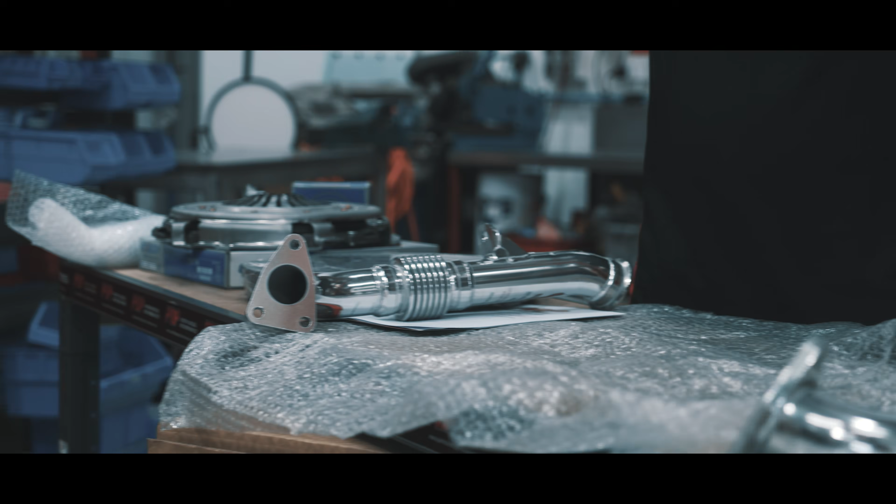But we haven't done a handbrake. Deja vu, I think we've had this conversation before. Give me the keys and say see you later. At least you know it'll be fitted right.

Today is the Troopy's birthday. We are going to give it a bit of a tickle. Trav, how you going, mate? Good, mate, yourself? Run us through, mate. What are we doing? Yeah, so we're going to put some mods into the vehicle. Obviously, we're going to tune it. We're going to ECU tune it this time, something different.

And obviously upgrade the clutch, upgrade crossover pipe, put some gauges in the vehicle so you can monitor the temps. And also down here, we've got the intercooler upgrade, flash tuning the factory ECU. Yep. So there's no cut and splice or anything like that. It's all tuned the factory ECU. And once it's tuned, you probably should get to camp in the daylight.

I just want to add as well, we're not tuning for Rhonda. Oh man! Tuning for Ronny. Yes. Which means we're not tuning a race car, we're tuning a reliability car like what's proven on the 79. So along the way, as things go into the vehicle, Trav's going to explain why we're using those parts, and I'll come in with a few layman's terms things as well, in case he uses too big a mechanical word.

How do you spell mechanical again? I'm not sure, I'm only a mechanic.

Let's begin with some sweet, sweet sounds of the V8 pre-DPF with a straight pipe. So that is what the exhaust sounds like now. It's the same exhaust that was on before we tuned the vehicle. It's a 3-inch Redback exhaust, straight pipe. Now I have tried the other options, we'll get to those in a second. But that's what it sounds like now. And it's changed a lot because of the crossover pipe, the tune, and of course the intercooler as well. It all makes a little difference.

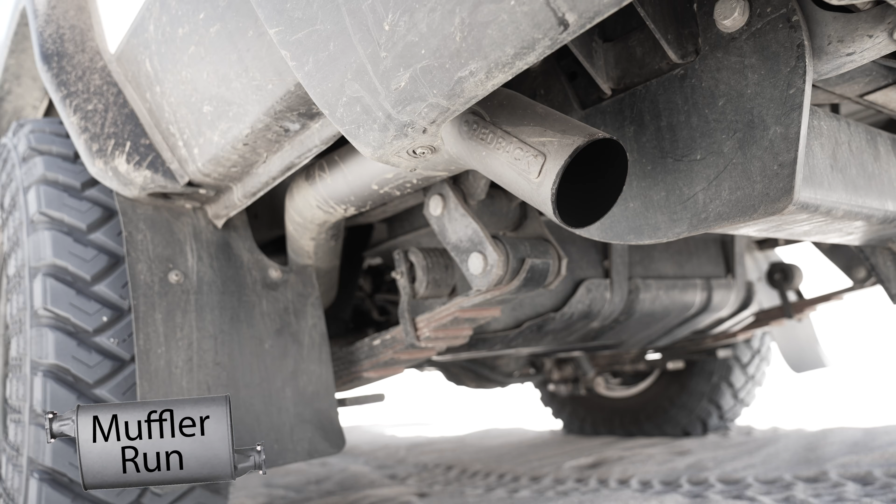This is what it sounded like before. Now, before. Now, before. As I mentioned, we have tried other options, the resonator and the muffler, and this is what they sounded like before the tune. Standard muffler. If it wasn't for the V8, I wouldn't notice the car's even on. From inside the car though, you can't really tell too much.

Okay, resonator. Liking that sound. Feels and sounds like a V8. This feels so much lighter than the 79. Labouring up the hill. Definitely hear it inside the cab though. Here we go.

Alright, we did it. Straight pipe run. Definitely a crackle. Yeah, I like this. Oh, there's the crackle. And that's how a V8 should sound.

So again, muffler, resonator, straight pipe, muffler, resonator, and what it sounds like now again with the straight pipe.

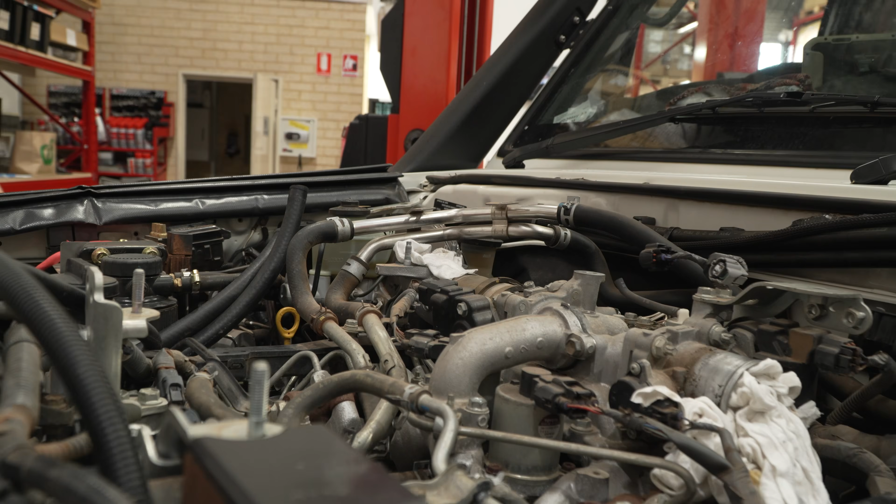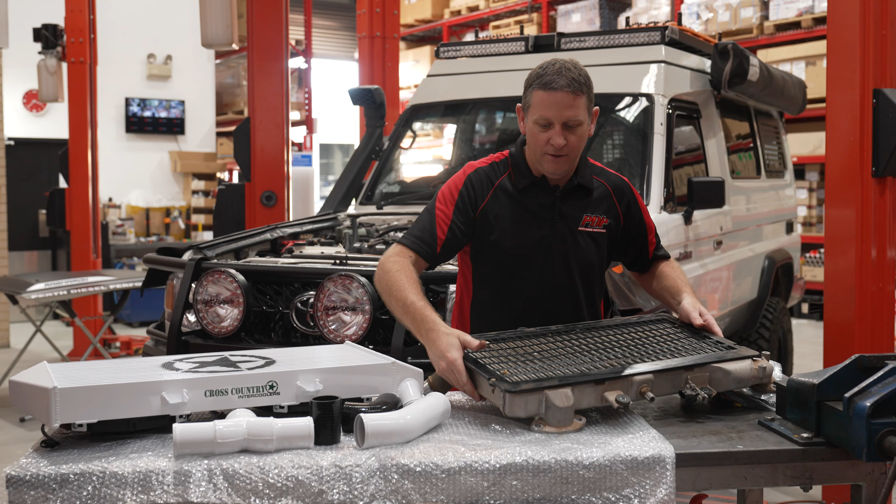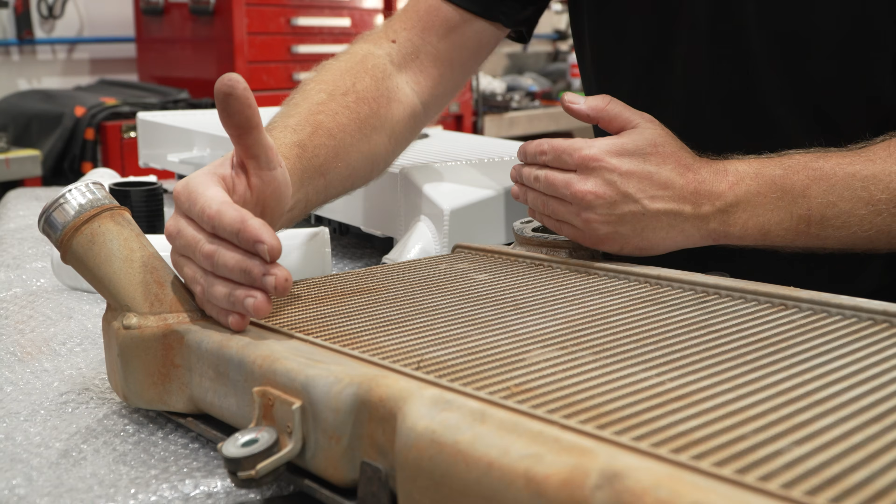Okay, so we've just got the factory intercooler off. What we're going to upgrade with is the Cross Country intercooler. As you can see, there is a slight change in size of the cooler. The core is much thicker. The subtle differences in the two intercoolers: the factory intercooler here, you're going to see the extrusion runs from the front tank to the back tank. And then when we come over to the Cross Country intercooler, we then run from left to right.

So effectively, we've got about 270 millimeters of extrusion in the tube here, and this is roughly around 600 mils, so it means there's more surface area, so obviously the cooling efficiency of the intercooler is going to be much better. With the added bonus as well, we've got the fans underneath to help with the low down speed so we can get the airflow through, so we've got more cooling capacity. And obviously it's a thicker extrusion as well, the core itself.

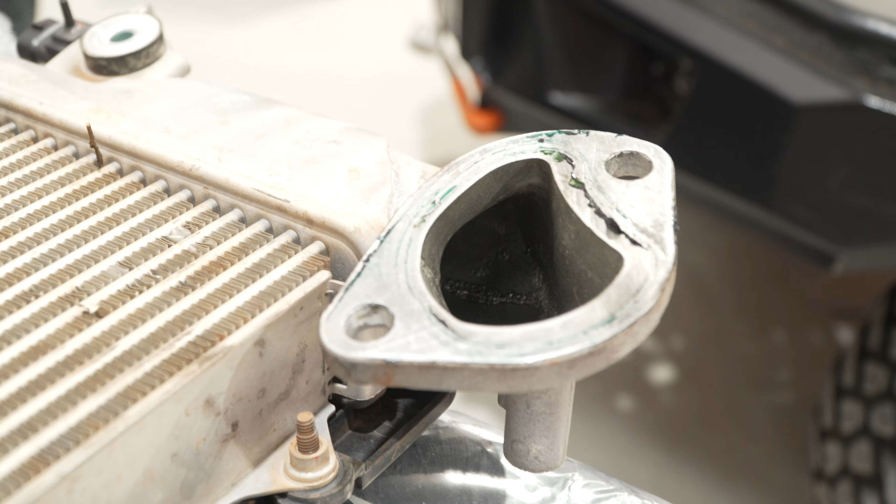Inside of the tanks, the factory cooler has a lot of sharp edges, which obviously reduce airflow. And inside the Cross Country intercooler, they've done their art. Everything's nicely finished off, all TIG welded, mandrel bent pipe work, and obviously larger silicone hoses and clamps to suit. We'll get this on the vehicle and get it all fitted up.

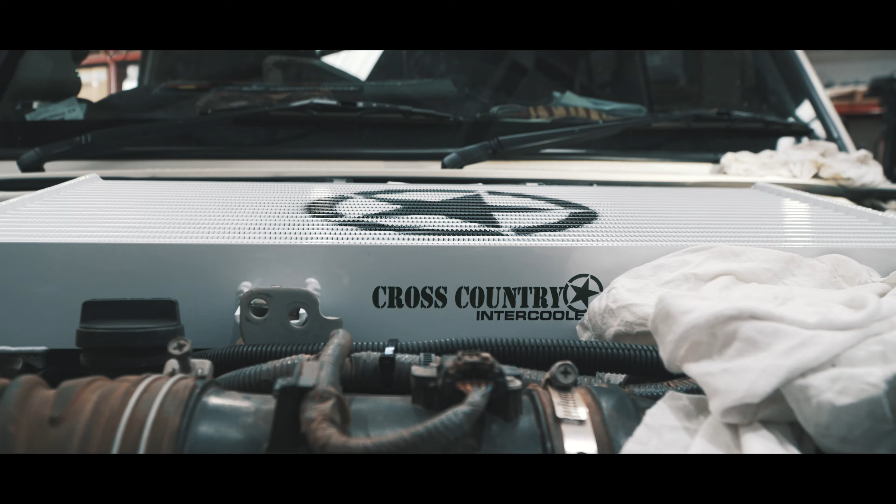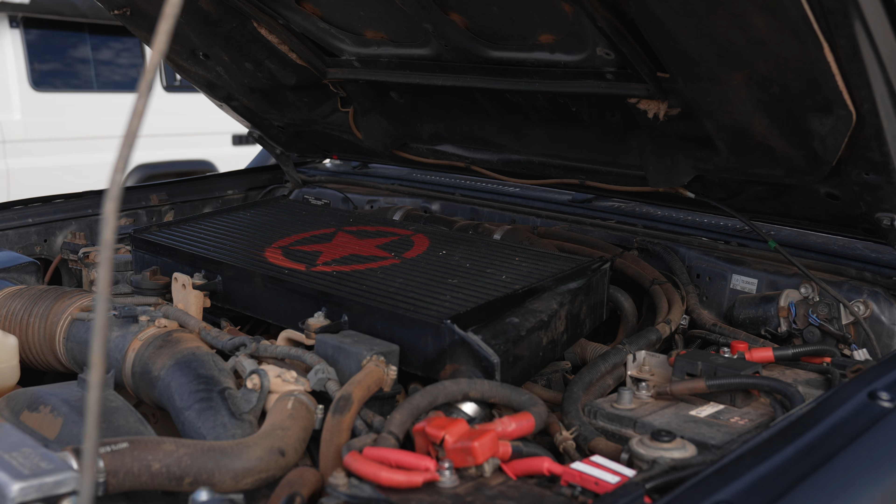Apart from mounting the intercooler to the engine, you also have to trim the hood lining and add a couple of brackets. By the way, I've had this exact same intercooler on the 79 for 2 years. In complete layman's terms and experience with the 79, putting this exact style of intercooler in your vehicle will reduce your EGTs by 50 degrees.

50 degrees Celsius may not sound like much when we're talking exhaust gas temperatures, but when you're teetering on the edge of 550 EGTs towing a trailer on a beach for a long period of time, you don't really want to be sitting up at those degrees.

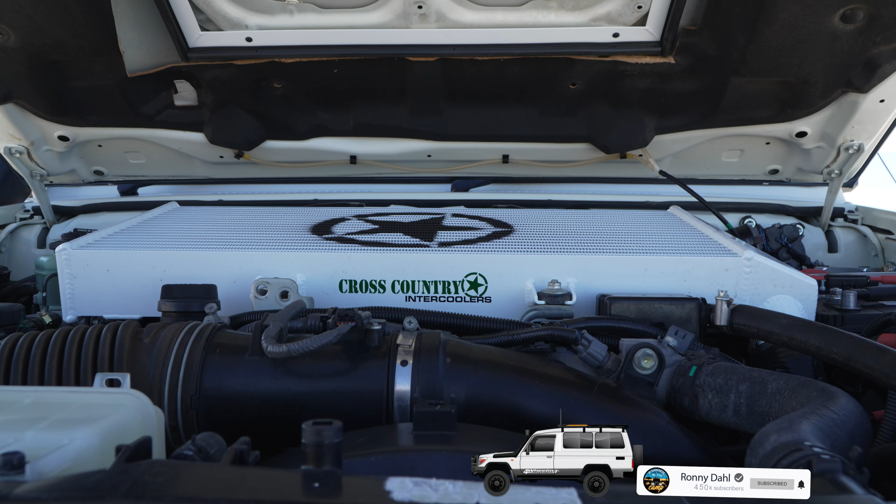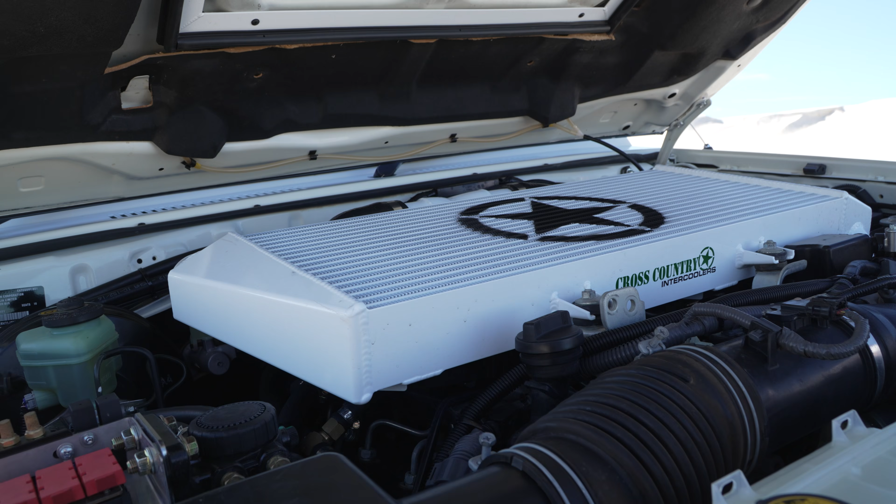But sitting at 500 is acceptable, and in some cases, all the way down to 450. And that's the main reason why I upgraded the intercooler on my 79, and the same reason why I'm putting the same system on the 78. And that's really good. So on the highway going up hills and stuff, it used to go right up to 500 or 550, but 450, 500, much better. I'm not worrying about the engine too much being so hot.

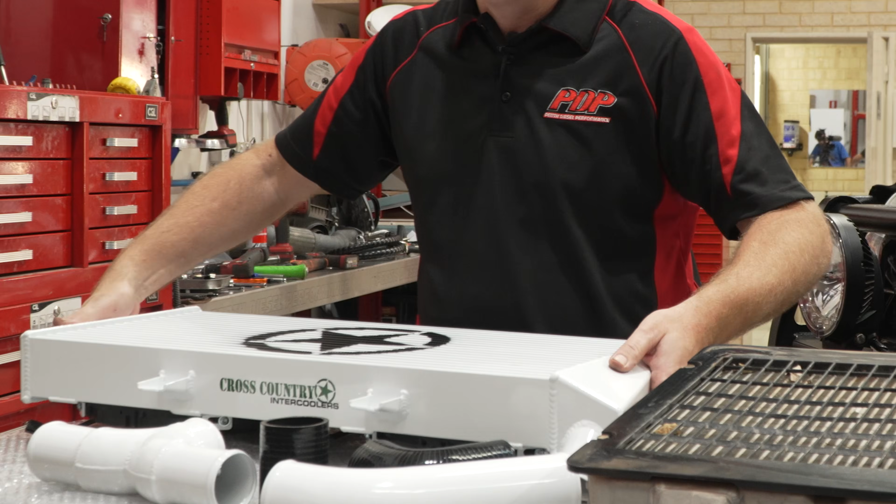But not only that, in low range, when you're sitting on some soft sand on a beach and you're not going that fast, the intercooler fans underneath will make up for the lack of the forced air coming through the actual bonnet scoop, which also in turn keeps it cooler. So an average of 50 degrees. And how do I know that? I can monitor it with these gauges right here.

This is the top one, the EGT gauge. This one down here is a boost gauge. With the EGT gauge, I can keep an eye on where the vehicle's sitting and how hot it's getting. And ideally for this type of vehicle, from learning from the 79, 10 years driving it, around 250 is good on the highway. And when you're really pushing it, look, 550 is just too much, as I mentioned just before. So ideally, when you're really pushing it, 450, 500, that's kind of where you want it to sit, maximum.

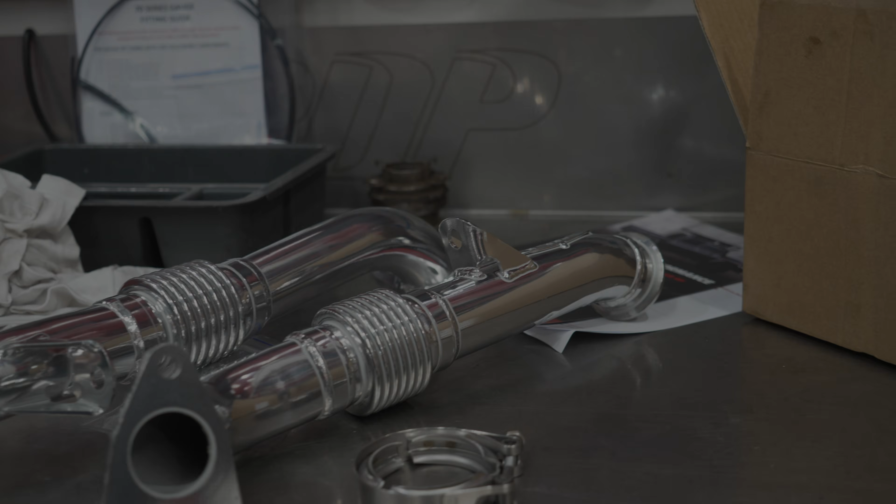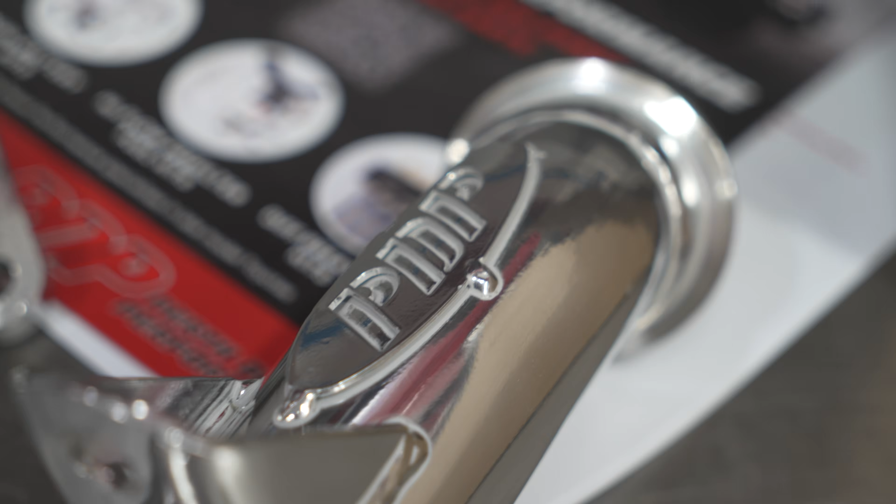So we've just taken off the factory crossover pipe. We're going to upgrade it with the crossover pipe here. Difference in the two, this one here is obviously still port matched flanges on here. It's ceramic coated to keep the heat in there, whereas the factory one's got the bellows and wrapping only in certain sections. It's got directional exhaust bellows in here, so as the gases flow one way. It's got a V-band in the middle, so fitting is easy. All the factory mounting points are there. It's got the new gaskets to install, so let's get it on the vehicle.

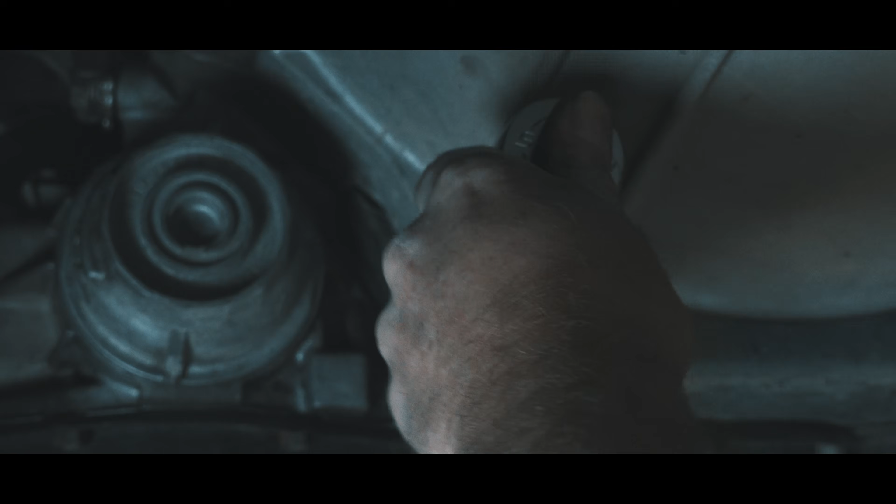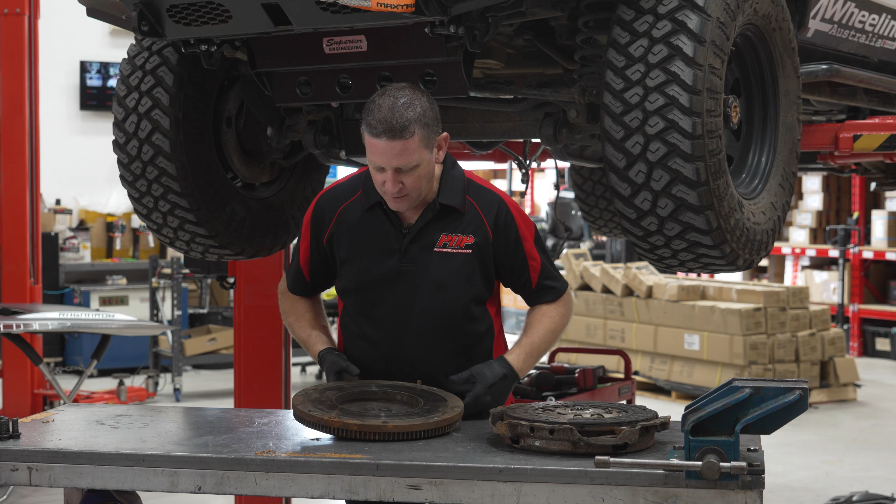Okay, so we've got the clutch out of the vehicle. Flywheel's actually looking pretty good, so Ronny's driving style, bit of a big tick, no real hot spots on the flywheel. However, the clutch engagement point was very high on the take-up, so it was time for a clutch upgrade. Clutch plate and pressure plate, all pretty good, just obviously got that degree of wear. So let's check out the new clutch upgrade we're going to fit today.

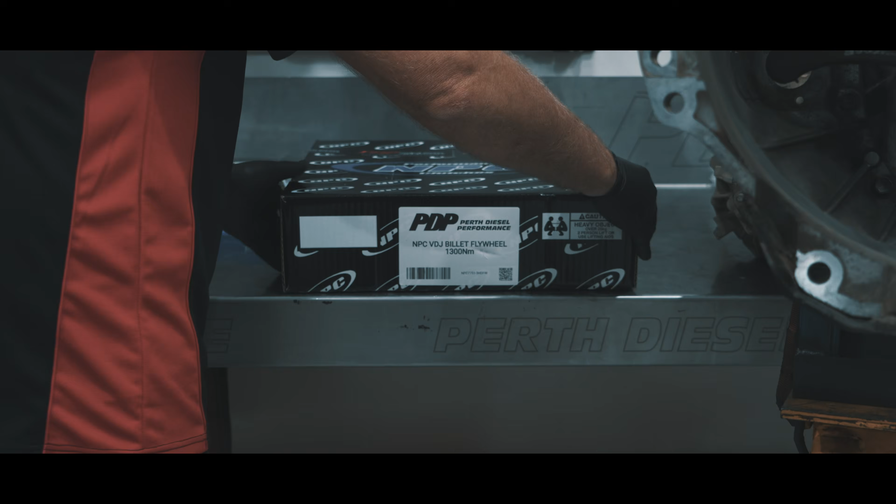Quick run through of the components. We've got a billet flywheel here. We've got the clutch cover. Also, we've got the clutch plate here. We've got a spigot bearing, throw-out bearing, and all the hardware to mount it up. We've also got an aligning tool, and we're going to reuse the genuine flywheel bolts. One quick tip I do want to say, when you're handling a new clutch, either clean your hands before you're touching the mating surfaces or put clean gloves on, because you don't want to contaminate the new clutch assembly. So let's get into it and get it fitted up.

In terms of the clutch, it feels amazing. Now obviously the main reason for the clutch is because we've tuned the vehicle. With the 79, when I first got the tune, we didn't upgrade the clutch, and straight away I was slipping in third and fourth gear, even in second gear actually. But the other benefit I've got now is before I was getting pretty tired in traffic because the clutch was so heavy as well. But now it's so much softer as well.

When I first got in, I almost put the bloody clutch pedal through the bloody floor. It's very similar to the 79, although the 79 feels a little bit different for some reason. It's the same clutch and everything. Might just be because I've worn that one a bit more. Feels really good. And the uptake on it is quite responsive too. There's no shuddering or anything like that.

Tuning Ronny's Troopy. I had to tune it with an ECU tune, so it's one tune, it's got to be fit for all purposes and safe and reliable. The difference between the two, obviously Ronny's 79 series was tuned with a Unichip with a piggyback ECU, and that has multiple maps, so we can do multiple tunes for different situations.

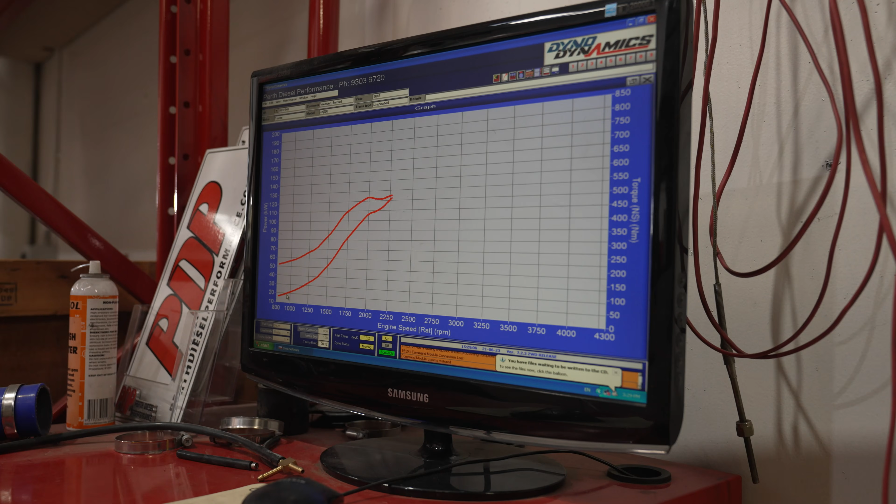Dyno tune, end results. Let's have a look at the graphs and the figures and run through them. Straight away, what you're going to see is the max power figures. The green is actually the before and the red is the after. For those that don't know, they are the max power figures. And now let's explain where the max power figures are.

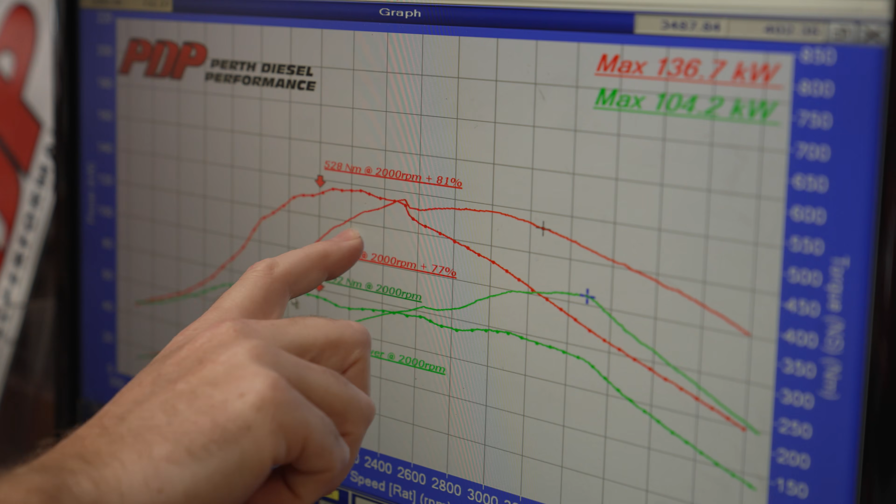We're going to talk power first as well. Obviously that's all it's relating to is the kilowatts at the rear wheels. Maximum factory power was 104 kilowatts and it was near on about 3,500 RPM. And now we've arrived at 136 kilowatts, but you'll see that the power curve is a lot broader and holds longer, so we've got more usable power.

However, let's refer back to a driving range. What we've marked on the screen here, you're gonna see 2,000 RPM. We've arrived at 61 kilowatts from factory, and we've come up to 108 kilowatts at 2,000 RPM. So that's a 77% increase at 2,000 RPM.

And as you can see here, it's very linear in the factory. So literally the more you rev, the more you get. So it encourages you as a driver just to keep revving the engine, hunting for more power. And what we've come up with here is a nice broader curve with more usable power. And obviously with that is gonna be the torque.

So next we're gonna discuss the torque and what the factory produced. The green line at the bottom of the screen here that runs up along here and then drops off, this is the factory torque. In the green here with the arrow, 2,000 RPM once again. We've got 292 Newton meters of torque at the rear wheels. Doesn't matter how much you rev it, you don't get any more torque, and that's what that line represents.

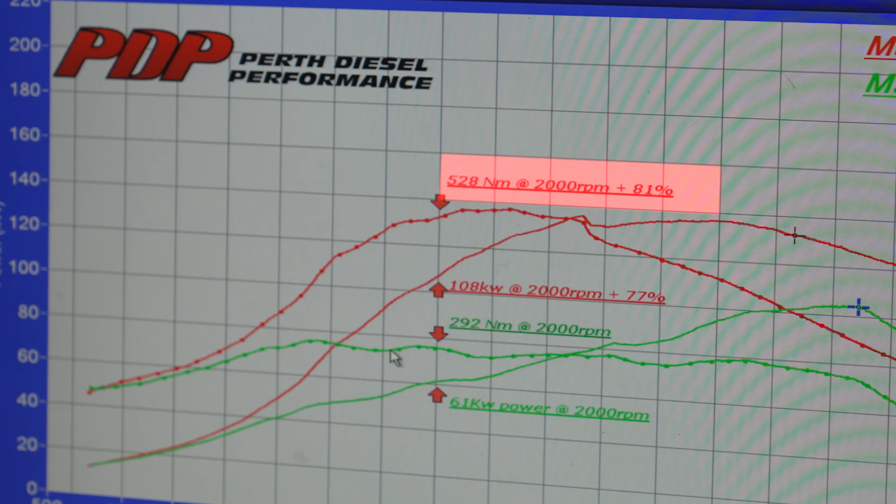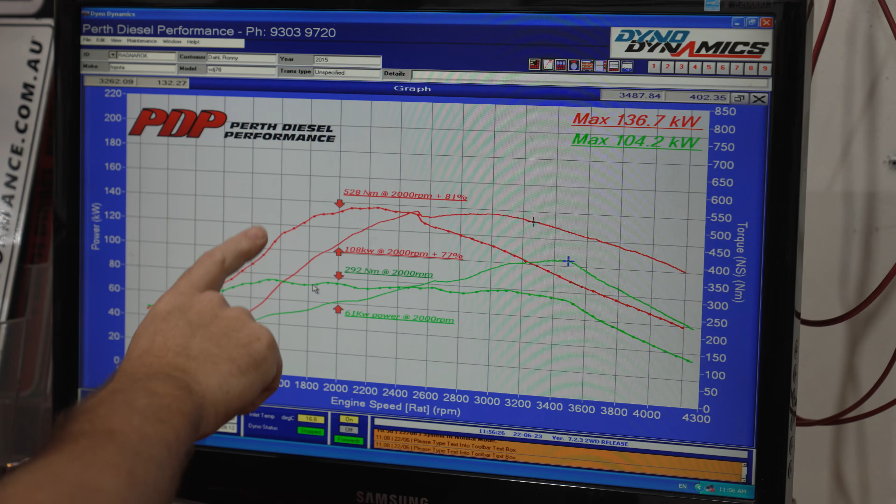In the end result here, broader, it's holding a lot longer. At the 2,000 RPM mark, we've got 528 Newton meters of torque at the rear wheels. That's an 81% increase in torque. So through the driving range, we've pretty much got great increases from 1,400 RPM all the way through to 3,000 RPM. That's generally where you're going to be driving the vehicle. A nice crisp engine response there.

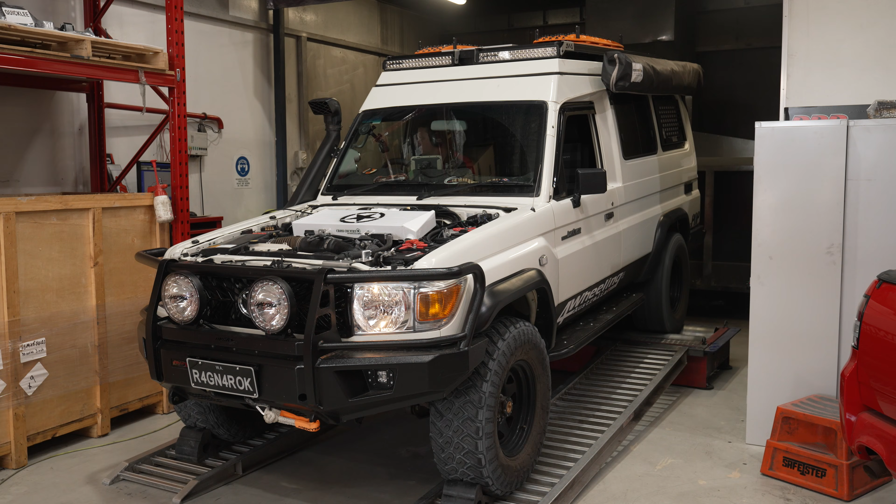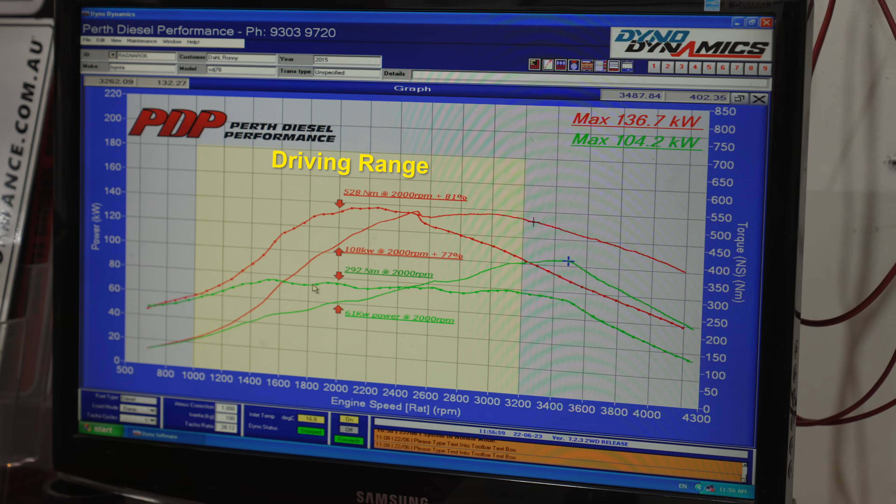One thing I want to point out, all of these results and what you're seeing here is just a wide open throttle setting. So that means your foot is pedal to the metal. Let's be realistic, you don't drive there that often. Under the curve, so all your part throttle, is where the focus needs to be. That's going to deliver you the best drivability and usable power, and that's what Ronny's going to see when he drives the vehicle and gets a nice clean response from the engine. It's killer!

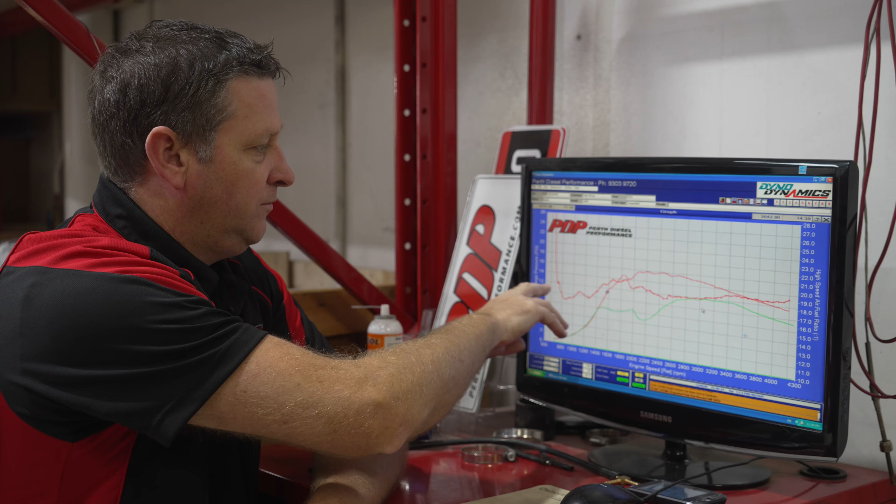Safe as houses. Remember, this car isn't brand new, near on 10 years old. Got to do one tune that's going to be fit for all purposes. We've got factory injectors, factory turbos, and a 10-year-old vehicle, so it'll be great to see what he thinks of it in a real-world application, on-road and off-road, and it's a one-tune-fits-all package. Let's see what he has to say.

With the tune, because I knew we had to finesse the tune a little bit. So far, oh my God, it's perfect. Almost feel like it's a better tune than what's in the 79. And that was the whole idea, to find the tune that I could use for all purposes: highway, low range, slow, torquey climb stuff. Found the guards then. This thing desperately needs a lift.

Woohoo! This is awesome. So happy with the power out of this thing. It's just turned this thing into a beast. To start with, going from the 79, which is an absolute monster, and then hopping into this thing that was stock, it was kind of like a grandpa spec, but now it's killer.